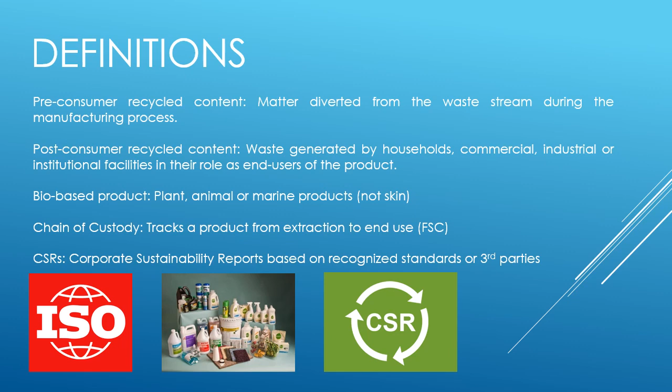Next is the bio-based product, which is a product that is composed in whole or in significant part of biological products, renewable agricultural materials, or forestry materials. And last is chain of custody, which is a procedure that tracks a product from extraction to its end use.

The intent of this credit is to encourage the use of products and materials that have environmentally, economically, and socially preferable life cycle impacts. This credit also intends to reward project teams for selecting verified products that are extracted or sourced in a responsible manner.

Some reasons behind this intent are illegal extraction practices and processes that can harm the environment and indigenous people's rights. Another one is that the CSR, also called Corporate Sustainability Reports, enable transparency and environmental impacts to be studied and improved by comparing them to each other. Last but not least, teams are encouraged to reduce raw materials usage by switching to reused and recycled materials.

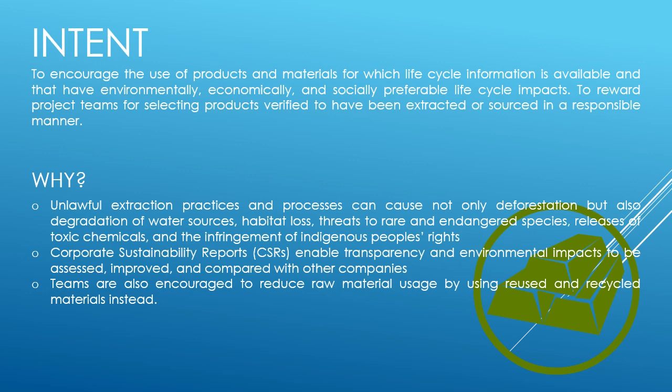There are two options for the requirements of Credit 3. The first one is raw material source and extraction reporting, which is merely to ensure that the selected products address responsible sourcing criteria through self-declaration or a third-party verified corporate sustainability report.

Acceptable CSR frameworks include Global Reporting Initiative, also called GRI, Organization for Economic Cooperation and Development Guidelines for Multinational Enterprises, UN Global Compact, ISO, and USGBC approved programs.

The second option is the leadership extraction practices, which require the project teams to use products that meet at least one of the responsible extraction criteria below for at least 25% by cost of the total value of permanently installed building products in the project.

The criteria include extended producer responsibility, which is a policy approach under which producers are given a significant responsibility, financial and/or physical, for the treatment or disposal of post-consumer products. Bio-based products should meet the Sustainable Agriculture Network's Sustainable Agriculture Standard and also be tested using ASTM.

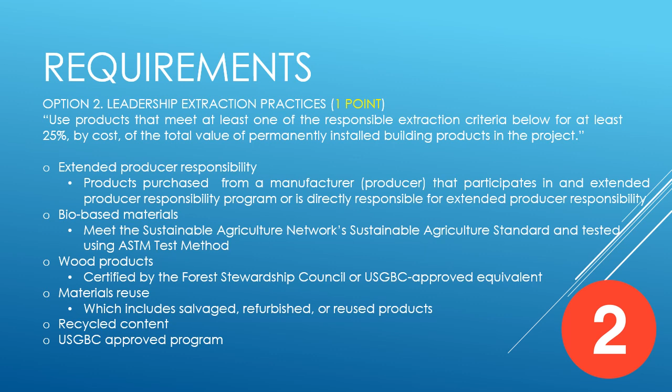We will now go to the step-by-step guidance for the first option. The first step is to specify and select compliant products. Project teams have to select products from manufacturers that can provide reports of raw materials from their suppliers.

Their report must include the extraction locations, commitment to long-term ecologically responsible land use, commitment to reducing environmental harms, and commitment to meeting voluntary standards or programs that address responsible sourcing. The reports may also be available in the form of a corporate sustainability report, and include performance requirements to source compliant products as applicable to the selected options in the project specifications.

The second step of the first option is to track purchases throughout construction. It can be done by continuously tracking substitutions and change orders and collaborating with the team members to check the progress related to the credit compliance. It is stated that the best source of documentation is the manufacturer or the organization that manages the reporting program.

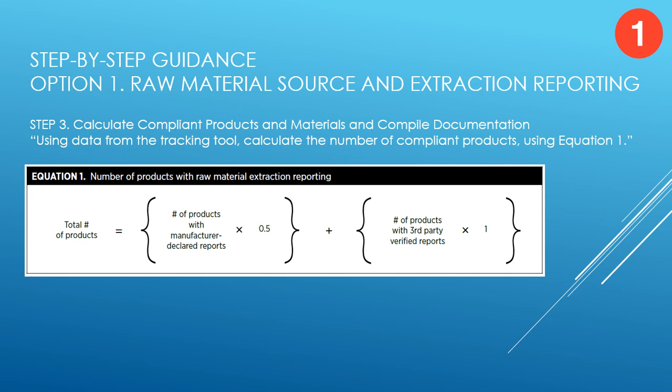The third step is to calculate compliant products and materials and compile documentation. The number of compliant products can be calculated using equation 1 shown on the slide.

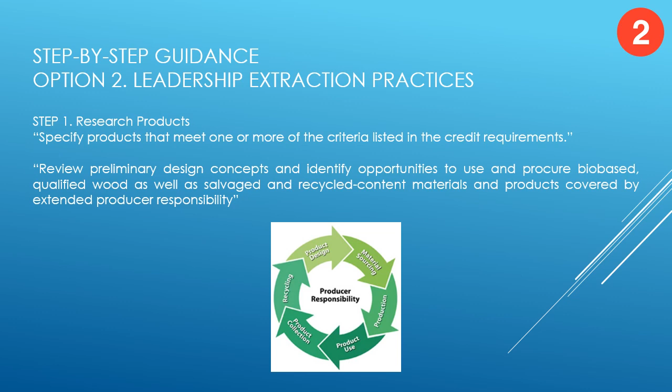For the second option, the first step is to specify products that meet one or more of the criteria listed in the previous slide. Preliminary design concept review can also be done to find opportunities for using materials such as bio-based, qualified wood, recycled content materials, and also products covered by the extended producer responsibility.

The second step of the second option is quite similar to the second step of the first option, which is to track purchases throughout construction. It can be done by coordinating a review of the construction product submittals to ensure that the selected products meet credit requirements.

The last step of the second option is to determine the total value of compliant products using equation 2 and compile documentation. Compliance is based on product cost.

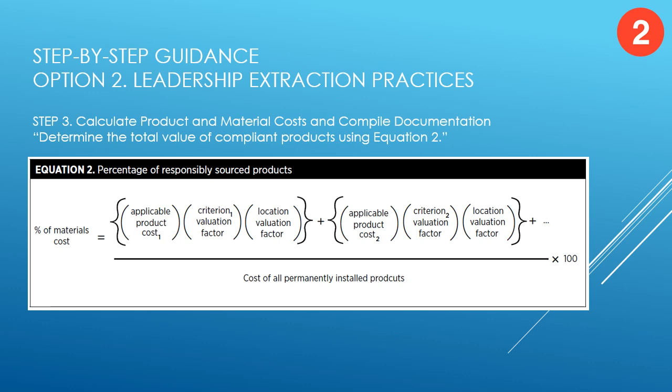Raw material reporting and corporate sustainability reports. For a product to count toward credit achievement, it must be published within 1 year of the project's LEED registration. On top of this, 90% of the contents of the product must be made up from raw material.

A sample framework includes the following: Global Reporting Initiative, or GRI, Organization for Economic Cooperation, OECD, and UN Global Compact Communication of Progress, which lays a framework for 10 principles in 4 core areas, which are human rights, labor, environment, and anti-corruption.

Extended Producer Responsibility, otherwise known as EPR, is a strategy to integrate the lifecycle environmental cost of a good into the market price of the product. The goal of this program is to shift responsibility toward the manufacturer and away from the municipalities using the product. It is a good incentive for producers to consider environmental impact during production.

2 programs commonly used are manufacturer-based programs, in which the manufacturer will have a take-back program for products to be recycled. Another program used is a third-party program where a separate business is created to collect the material and either sells or returns the material to the manufacturer for reuse.

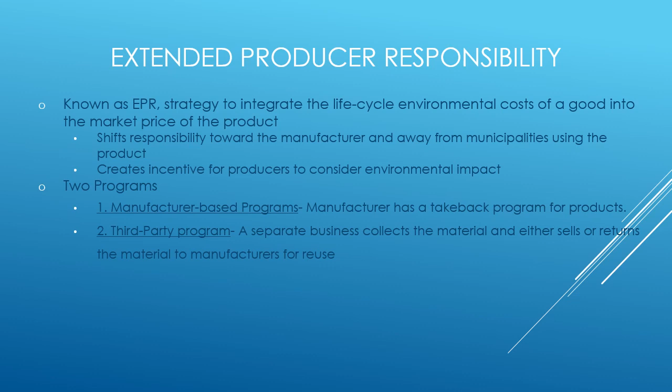Material reuse considerations. For a material to be reused, a cost analysis must be done. If the reused material has a lower value than using a new material, the new material must be chosen. This usually leads to limited opportunities for the reuse of materials. However, some materials that are generally able to be reused include salvaged brick, structural timber, railroad ties, and stone.

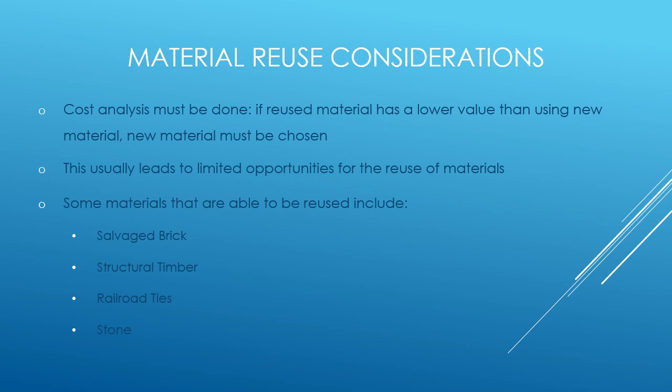Recycled content. Reuse of materials includes rework, regrind, or scrap product. You may only count these as pre-consumer recycled material if they are to be used in a different product than the one whose production generated the waste. To calculate the total percentage of recycled material used in a project, you must know the amount of each content used. The 2 types of content are post-consumer content and pre-consumer content.